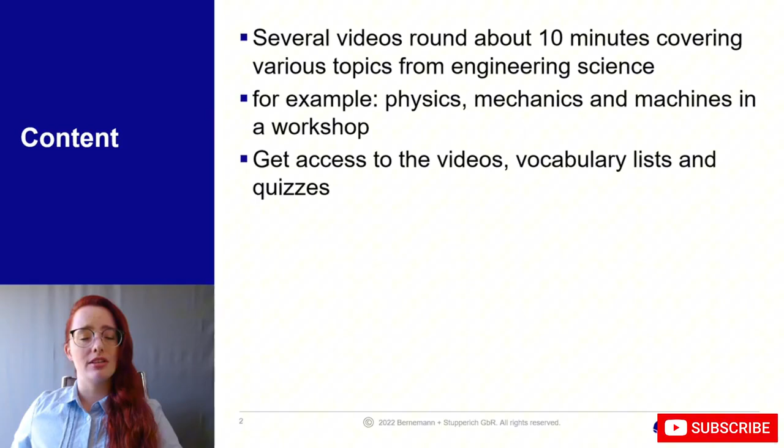Who is the audience, in my opinion? Well, I think that this course suits all people who want to expand their technical vocabulary. I also think that it suits employees from companies who work internationally or employees who need to visit a subsidiary or a production site in an English-speaking country. I would also recommend this course for students who want to prepare themselves for an exchange year in an English-speaking country. But in general, I think that this course could help engineers from all areas, from mechanical engineering, about electrical engineering, to civil engineering, to material engineering, and many more.

What is the goal of this course? We want to help you to build up your specific vocabulary for working as an engineer in an English-speaking country. A nice side effect is a short repetition of some technical basics, since the transmission of knowledge will take place with the help of science basics, which are relevant for most areas of engineering.

So, who am I? My name is Sarah. I'm 29 years old. I'm a trained car mechatronic. I've also received my technician's degrees for car technology and electromobility. I've worked as an assistant in research and development for diesel engines, and currently I am completing the teacher's training program at the RWTH Aachen in Germany. My subject in school will be engineering and English.

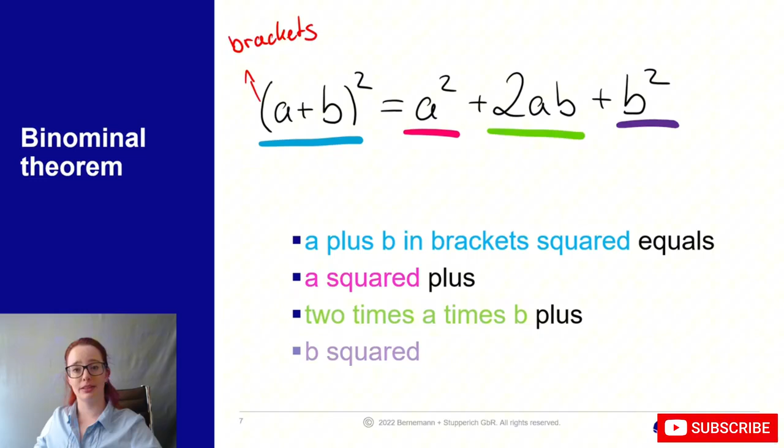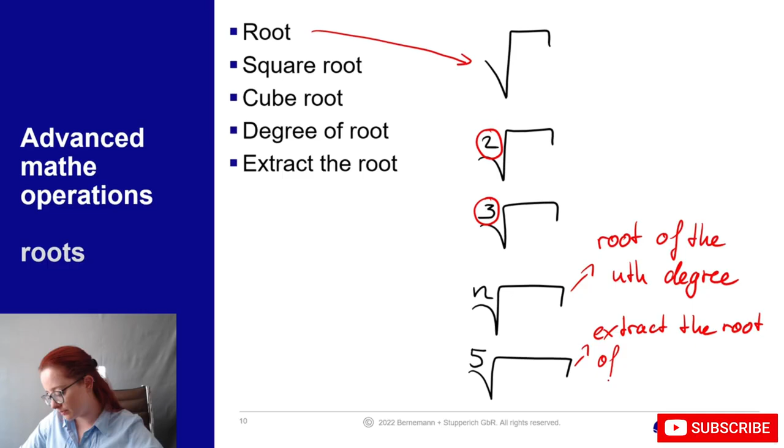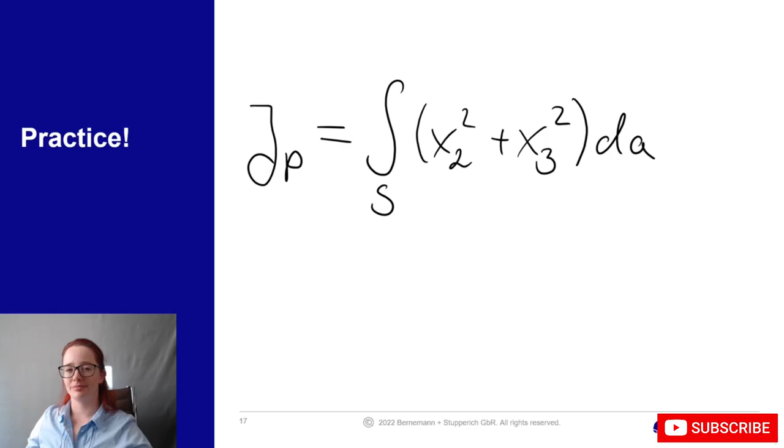Our last practice example. Pause the video and write it down. I would say something like jp equals the integral in the limits of s over x2 squared plus x3 squared times dA.

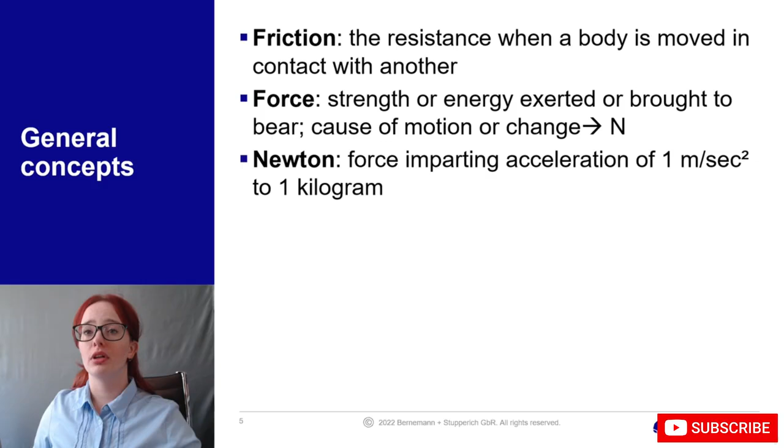1 Newton is the force imparting acceleration of 1 meter per second squared to 1 kilogram. Work is the force multiplied by distance moved. Gravity is the force that attracts objects towards one another, especially the force that makes things fall to the ground. And lastly, pressure. Pressure is force divided by area.

Now we will talk about some temperatures. Thermodynamics is the science of the relationship between heat, work, temperature and energy. Thermal energy is the internal energy present in a system in a state of thermodynamic equilibrium by virtue of its temperature. Temperatures are measured in Kelvin, degrees Celsius, or degrees Fahrenheit. Since Fahrenheit and Celsius aren't to be compared 1-to-1, there are some differences.

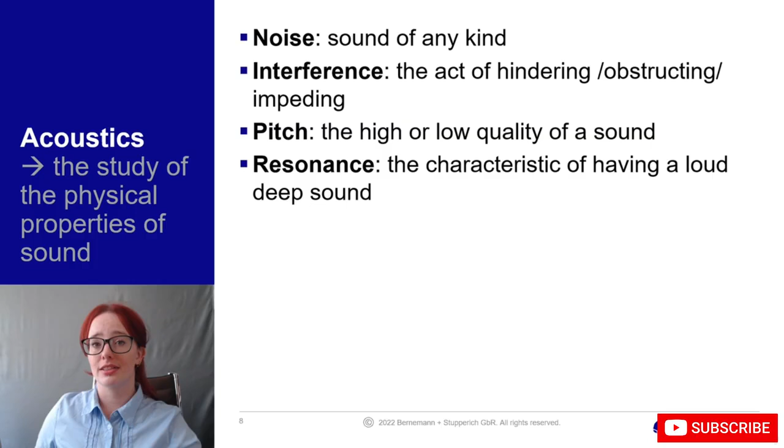Let's talk about acoustics. Acoustics is the study of the physical properties of sound. Noise can be any sound. Interference is the act of hindering or obstructing or impeding a wave. Pitch is the high or low quality of a sound. Resonance is the characteristic of having a loud and deep sound. A reflection is the phenomenon of a wave being thrown back from a surface. And lastly, decibels are a unit of sound intensity.

Let's talk about waves a bit more. A wave is a movement up and down or back and forth. Wavelength is the spatial period of a periodic wave, the distance over which the wave's shape repeats. Frequency is the number of occurrences within a given time period. Amplitude is the greatness of magnitude. Hertz is a measurement unit.

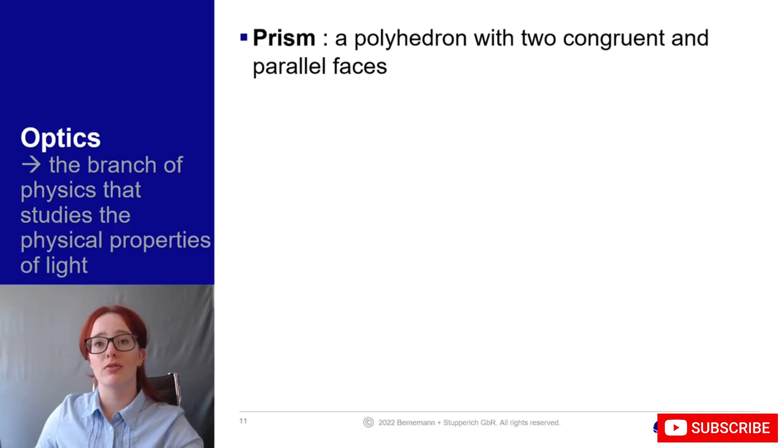Next up, we want to talk about optics. Optics is the branch of physics that studies the physical properties of light. A prism is a polyhedron with two congruent and parallel faces. A refraction is the change in direction of a propagating wave. If something absorbs, it takes something in, for example, waves of light.

Let's talk about chemistry. Chemistry is the scientific study of the properties and behavior of matter. Organic is a chemical compound which has a carbon basis. A compound is a substance formed by chemical union of two or more elements. For example, water is a compound because it is H2O. An element is a substance that cannot be separated into simpler substances, for example simply the O. A formula is a symbolic representation of the composition of a compound, so we could say 2H plus 1O become H2O.

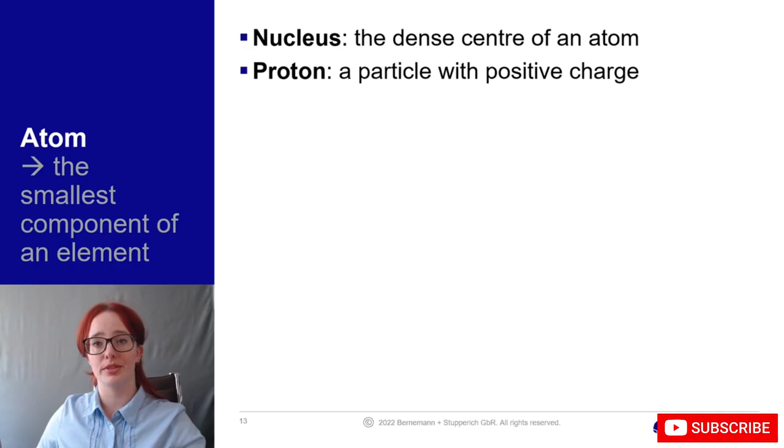Let's talk about atoms. They are the smallest component of an element. We have the nucleus, which is the dense center of an atom. We have the protons, a particle with positive charge. The neutrons, particles with zero charge. The electrons, particles with negative charge. Valence electrons are special electrons since they are in the outer shell of an atom, which can combine with other atoms to form molecules. A molecule is a group of two or more atoms held together by attractive forces.

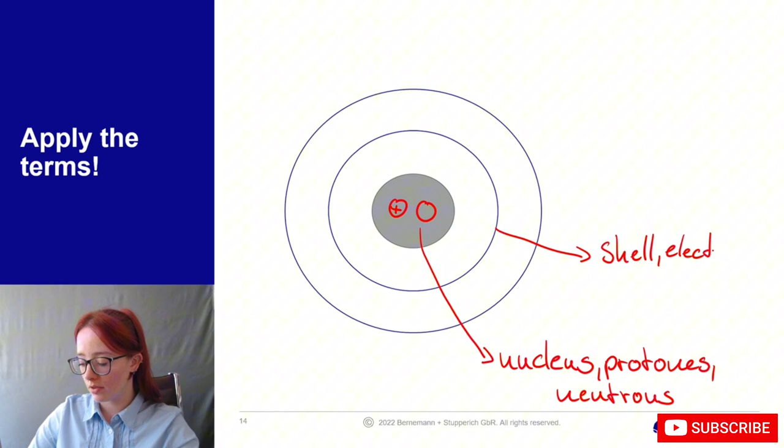Let's start in the middle of this thing. Here we have the nucleus. It consists, as you maybe remember, of protons and neutrons. If we move wider, we have the first shell, it's got electrons. And the most outer shell consists of valence electrons.

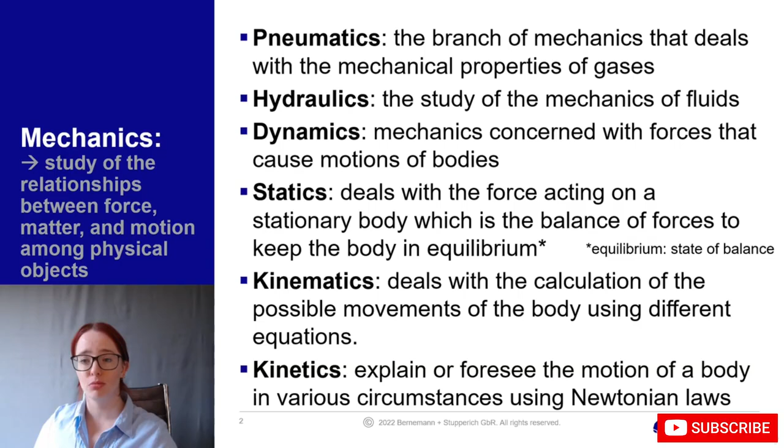Now let's talk about some general terms. First up, energy. Energy is the capacity of a physical system to do work. Potential energy is energy stored by a body or system by virtue of its position. So if we have, for example, this little tube and it is positioned down here, it has a lower potential energy than if I would lift it above my head. That's all what potential energy says.

Kinetic energy is the mechanical energy that a body has by virtue of its motion. So if I have this little tube here and now it would fall down, during the fall its kinetic energy would be higher than when it is standing still.

Power is the energy transferred per time, and work causes a change of energy. Joule is a unit of electrical energy, but it can also be transformed into other units. Talking about units, let's have a short look at these.

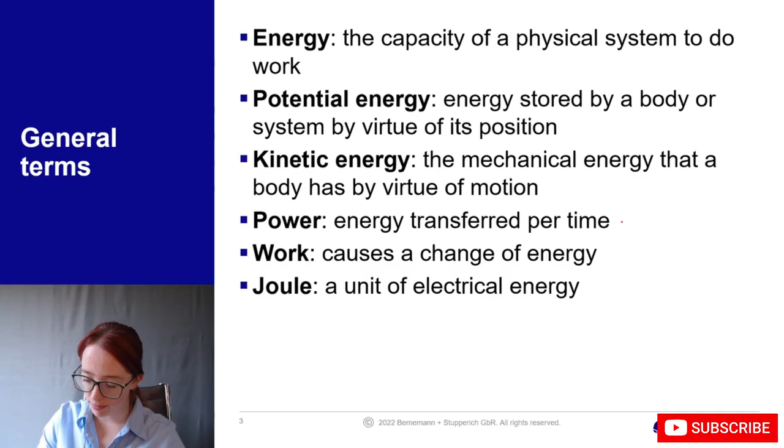Power is written with a capital P, and its unit is the watt. But 1 watt is also 1 joule per second, and we can also say it's 1 volt multiplied by amperage. But we can also say it equals 1 kilogram times meter squared divided by a cubic second.

So here we see that all these units are somehow linked to one another. It's important to have them in mind, and also to check your calculations, for example, to have a look whether these units make sense in your equation.

So after this little transformation of units, let's head on. Now we will talk about some simple machine parts you will come across when you are studying, and you often have to do some basic calculations.

First up, the rope. A rope is a strong, thick string made of twisted threads, like this one. So here we have our rope, and as you can see, it is on a hook.

Next up, the rod. A rod is a long, thin pole made of wood or metal, like this one. They are often used for framework constructions. So the area of a rod is something round.

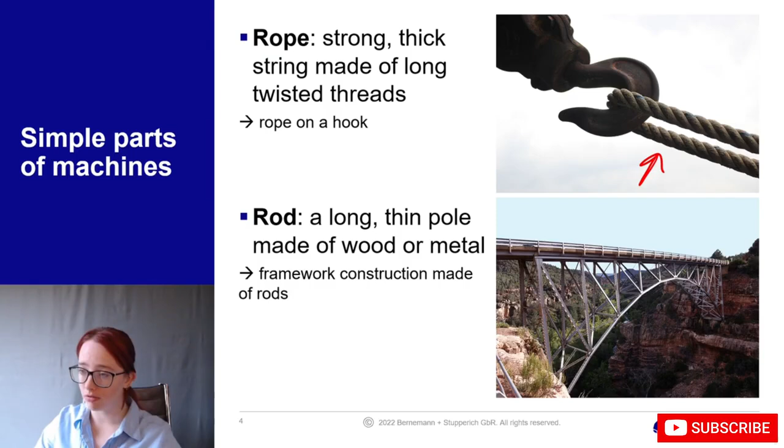This is important because next up, a bar is also a long, thin, straight piece of metal or wood, but as you can see in the picture, they have an area which is most often like this, or it could also be tetragonal or hexagonal, and they are used to make gates, for example.

A beam is a long, thick piece of wood, metal or concrete, especially used to support weight in a building or other structures. Here you see it used as parts of a framework construction in a house.

So let's talk a little further about simple parts of machines. A bearing is a machine element that constrains relative motion to only the desired motion and reduces friction between moving parts. We can have a fixed bearing or a floating bearing.

Here we have a ball bearing, and it is often used as a fixed bearing since those little balls are moving inside this little notch. I hope you have an idea what I'm talking about. And because they cannot move from one side to another, it is fixed, and therefore it's a fixed bearing.

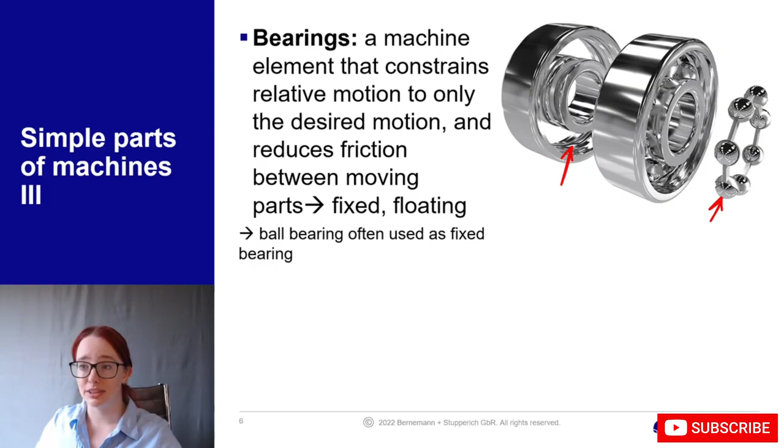A centroid, or the center of gravity—I think most of you will already know it. So if I have an object, it has a centroid or a center of gravity. And if we have a triangle like this one, we will find it quite easily. Now you see I'm balancing it on my finger, and it's still somehow in equilibrium, so it doesn't move.

Now we will talk about mechanical loads. First up, the stress. This is a force that produces strain on a physical body, and strain is the deformation of a body under the action of applied forces. So if I'm taking this triangle and I'm bending it, I apply stress and it ends in a strain of the triangle.

Velocity is the distance traveled per unit time in one direction. Well, we all know velocity—I think we know it best from cars or buses or bicycles. Speed is a rate at which something happens. So, of course, we all know speed from cars, bicycles, and trains.

But speed is also how fast or slow I am bending something. So even there we can talk about speed.

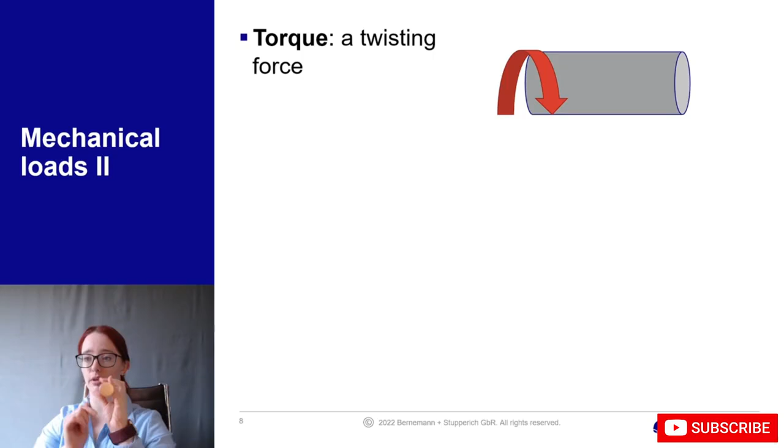More mechanical loads are, for example, the torque, which is a twisting force. So if I now here have something with a round area, I can twist it, but I can also do it with something cubic, but I just have this round thing.

Friction is the resistance when a body is moved in contact with others. So we all know it from, for example, a table or a chair we want to move across a carpet—then they have friction between each other. But if we have a look at my thingy here and I tear it apart, it also experiences friction between the rubber and the tube.

A distortion is a change of the original or natural shape of something. So for example, if you have a tennis ball, and you squeeze it, then it's a distortion.

The moment load is a turning force produced by an object acting at a distance. This sounds complicated, but it's simply something with a bearing. So here we have a fixed bearing, and then we have a force, which would be this hand, and it applies some strength. Now we have a distance and an acting force, and this causes a momentum.

A moment load. Be aware, a moment load is not the same as momentum. So I've done something wrong, because momentum is a product of a body's mass and its velocity.

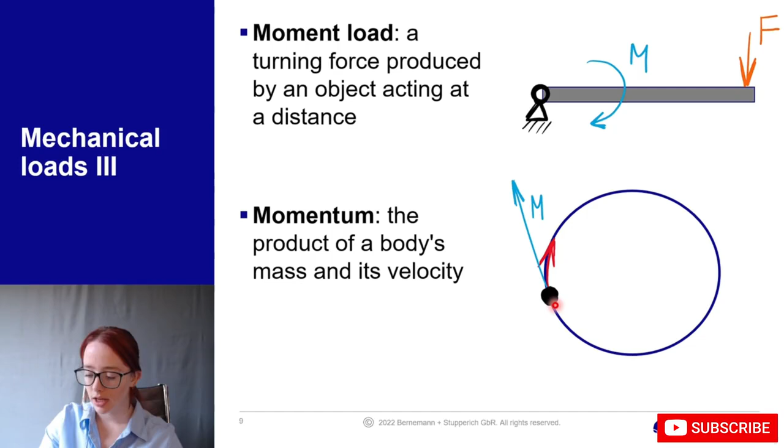For example, if I have a tennis ball on a rope and let it fly in a circular motion, it has a certain momentum. If I let go of the string, the ball would fly away. As you can see in this drawing, the ball is attached to a string connecting it to the middle of the circle, and it always has this velocity. If I let it go, it flies in a straight motion because of its momentum.

Tension is a stress that produces an elongation of a physical body, which means something gets longer. So again, if I take this tube and apply some tension, it got longer. The counter movement is pressure, the act of putting pressure on something so it becomes shorter. For example, if I take this and put it back together.

Let's talk about some applied mechanical loads. Rods and bars, the thin and long construction pieces, take only tension and pressure. Here we have a framework construction, and per definition this can only take a force like this or a force like this.

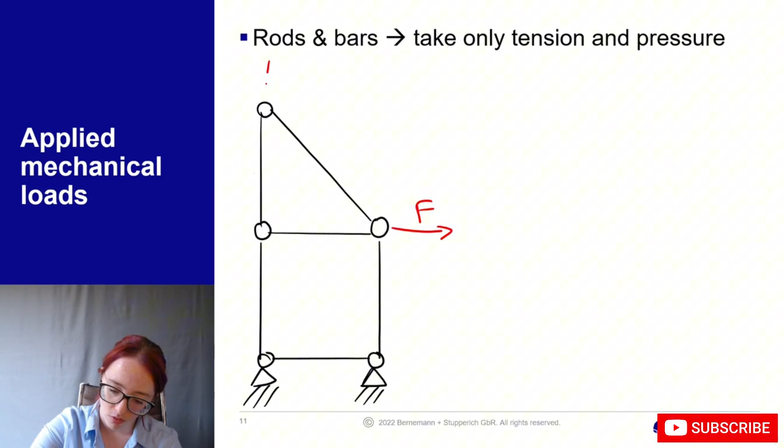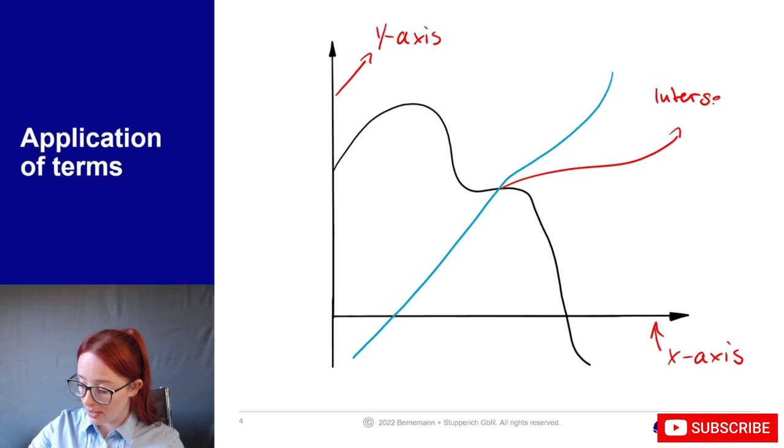So let's apply some terms we just learned. I will pause for a moment so you can pause the video and write down the words you remember. I want to start with the axis. So here we see our y-axis and here our x-axis. We also spot an intersection. I would say that the graph from here to here is linear. We can also spot some zero points, here and here. We can also spot some rising and some falling.

So next up are variables and sorting. We often have an independent variable, which is a value that does not depend on changes in other values, and the dependent variable, a quantity whose value depends on another quantity. So often the dependent variable depends on the independent one. If we have two variables, something is called bivariate.

A group is any number of entities which are considered as a unit. So if they are arranged into groups, you can say that they are grouped. We can also have classes, and a class arranges or orders by categories. If something is categorical, it is relating to or included in a class or in classes. And we can also categorize, which means we place something into or assign it to a category.

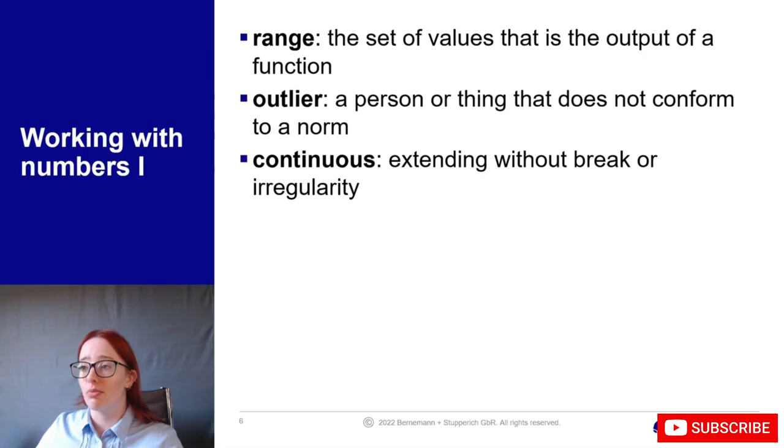Continuous means it is extending without a break or irregularity. If it is numerical, it is relating or denoting numerals, so numbers. If it is ordinal, variables have a natural ordered category.

A percentage is a proportion in relation to a whole. The mean is approximating the statistical average or the expected value. The median is relating to the middle value of an ordered set of values. The mode is the most frequent value of a random variable.

A correlation is a statistic representing how closely two variables covary. So if we are changing one, the other is changing as well. We can therefore say they are both depending on one another.

An interpolation is a calculation of the value of a function between known values, whilst an extrapolation is a calculating of a value outside of the range of known values.

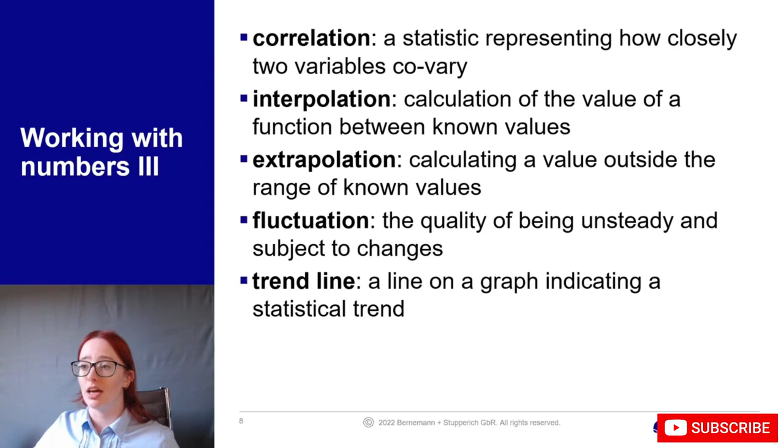Fluctuation is the quality of being unsteady and subject to changes. A trend line is a line on a graph indicating a statistical trend. We can therefore say that a fluctuation and a trend are somehow opposites to one another.

An interval is a set containing all points between two given endpoints. A frequency distribution is a distribution of observed frequencies of occurrence of the values of a variable. A variation is an instance of change, the rate or the magnitude of change.

So if we have a lot of variation, we have a wide range of data we collected with a very wide range of magnitude, for example. So maybe we collected many data points and we have values from 1 up to 500, then we have a lot of variation.

A deviation is the difference between an observed value and an expected value. So if we expected that we will only get 500 as a measurement, but suddenly we have 5,000, this is a very huge deviation. A discrepancy is an event that departs from expectations. So it's just like a deviation, but a bit more extreme and singular.

Distribution is an arrangement of values of a variable by frequency. A normal curve is a symmetrical curve representing a normal distribution. And exactly this normal curve is also called a Gaussian bell curve.

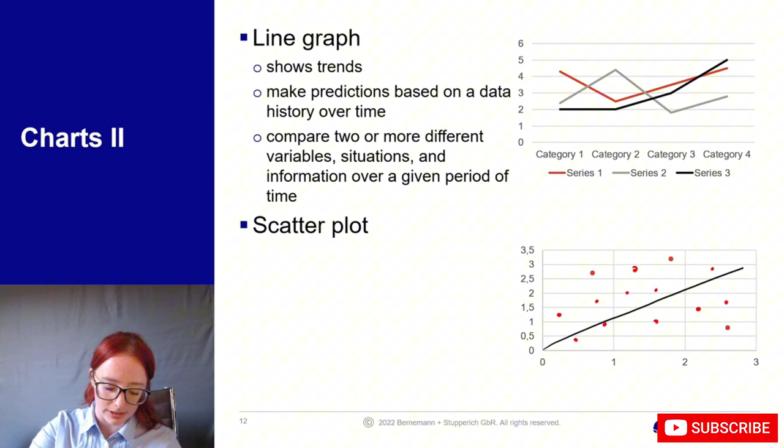Scatter plots help you find out whether there is a relationship between two variables. They predict the behavior of the dependent variable based on the measure of the independent variable—essentially, whether two things are dependent on one another.

Now we will talk about box and whisker charts. This is how they look. They visualize the upper and lower quartiles, the mean, the median, deviations, and other stuff. They are able to represent a huge set of data, giving a quick view of the dataset distribution, and they can compare data from different categories or datasets. Here we have three colors, so most probably three datasets.

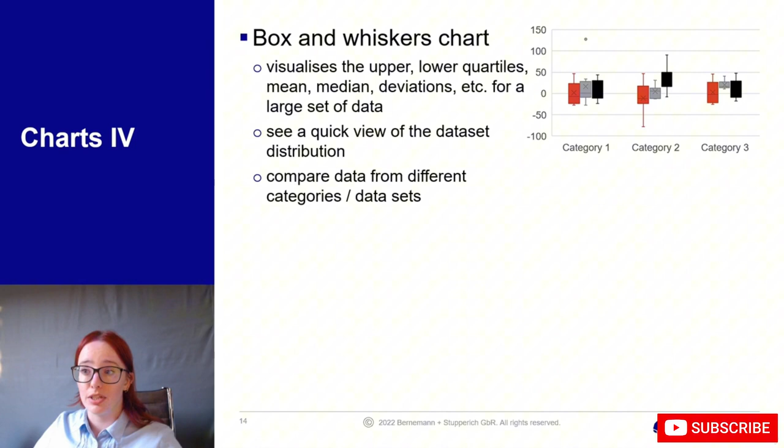Now it's your turn. I hope you will remember some of the terminology I just introduced, and that you can apply it now.

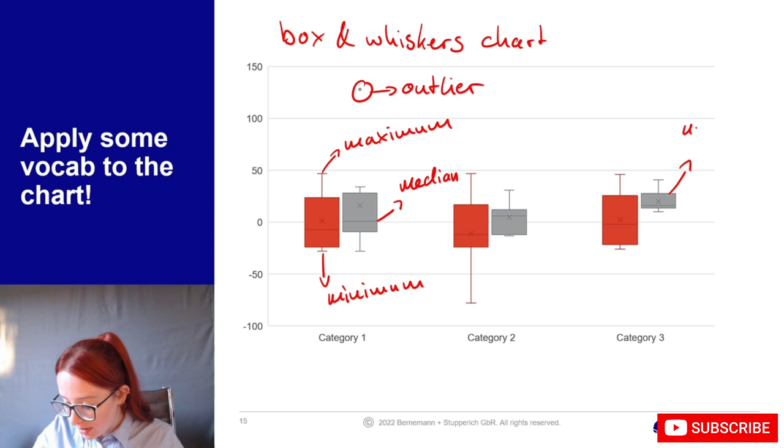So here we have a box and whiskers chart. We will start with this little spot here—this is an outlier. Here we have a maximum, here a minimum. The line in the middle is the median. And we can also spot the upper quartile and the lower quartile.

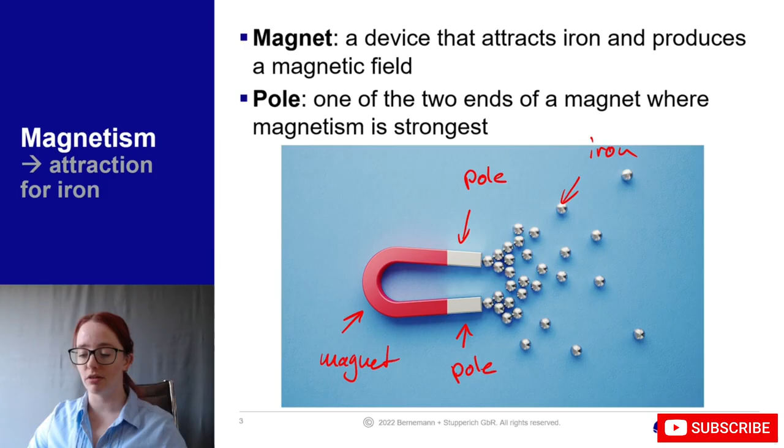To go a bit further into detail, we also have two poles—here is one, and here is one. A pole is one of the two ends of a magnet where magnetism is the strongest.

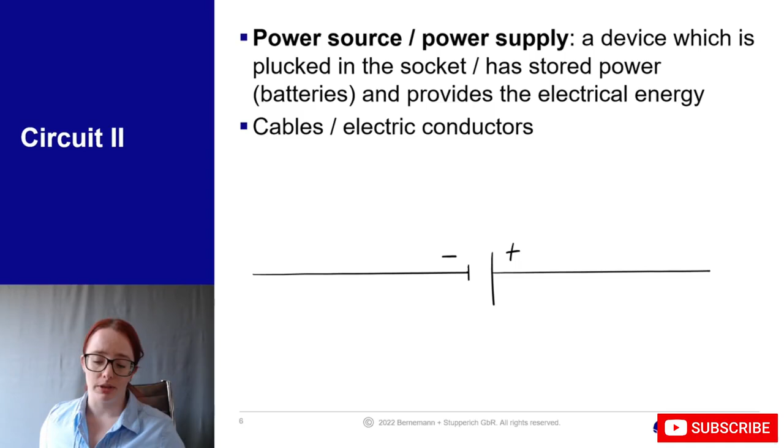So let's have a look at circuits in detail. We often need a power source or a power supply, and this is often a device which is plugged into a socket or which has stored power, for example batteries, and they provide electrical energy. And we need cables. So here we have our power source, and these two lines are our cables.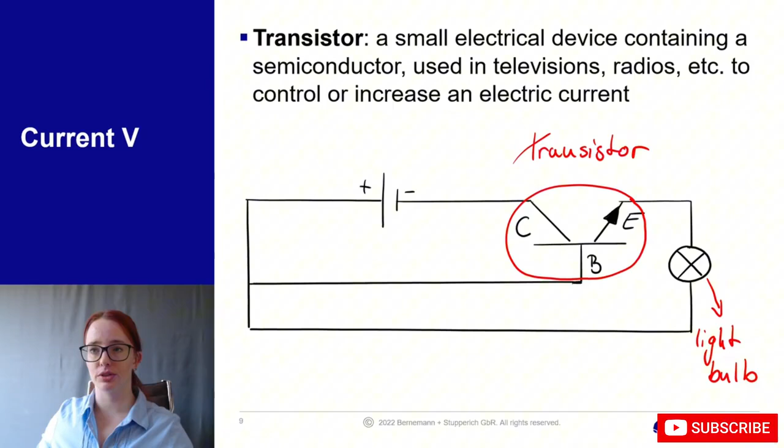So if we ask ourselves, where do we have these? A series connection is often in Christmas lights. If one is broke, there is no light shining anymore. And a parallel connection is often in batteries. If one is broke, the others will work perfectly fine. But of course, the power output will be less.

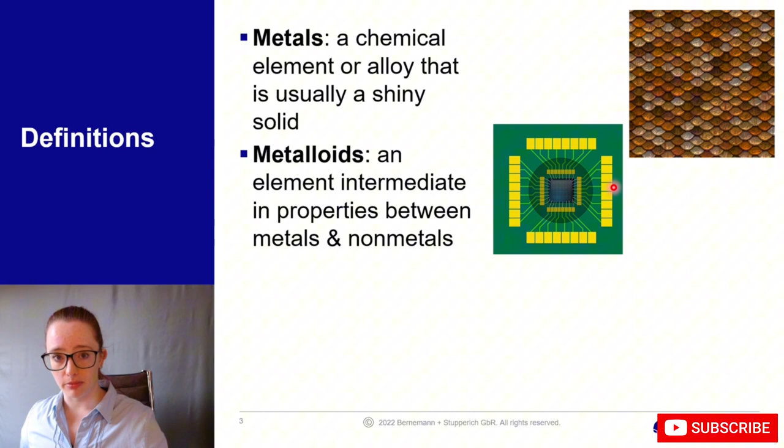So how are these defined? A metal is a chemical element or an alloy that is usually a shiny solid, so it is very hard and it often has a shiny surface. Metalloids are elements intermediate in properties between metals and non-metals, so they have some characteristics of metals, but also some of non-metals. And a non-metal is a chemical element that lacks the characteristics of a metal.

So let's talk about metals. Minerals are a solid inorganic substance occurring in nature, and within these minerals we often can also find metals. An alloy is a mixture containing two or more metallic elements. For example, all your jewelry is most probably an alloy of several elements. A grain is the form of the crystals in a metal.

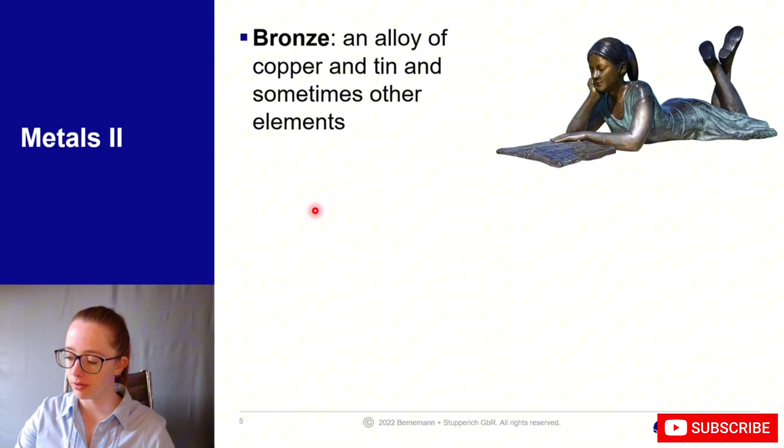So let's talk about metals a bit further. A bronze is an alloy of copper and tin and sometimes other elements. Here you can see that this figure has most probably around 3 different bronzes. The hair is very dark and has no coating on it. Then we have the face, the upper body and the arms, which are very brownish. And then we can see that the dress has this green-bluish coating, and I think that the dress most probably has the most copper in it.

Next, we want to talk about the metallic elements you can find in the periodic table a bit more in detail. I won't be able to talk about all of them, but I want to show you some which were the most important for my studies and also for my work.

First up is lithium. It is a soft silver-white univalent metallic element, and it is the lightest metal known. Next to it is beryllium, a light, strong, brittle, gray, toxic, bivalent metallic element.

Underneath it is magnesium, a light silver-white, ductile, bivalent metallic element. Magnesium is often used, for example, when you have a high-speed car and their rims are made out of magnesium, or the trunks, because it is very light but still very strong.

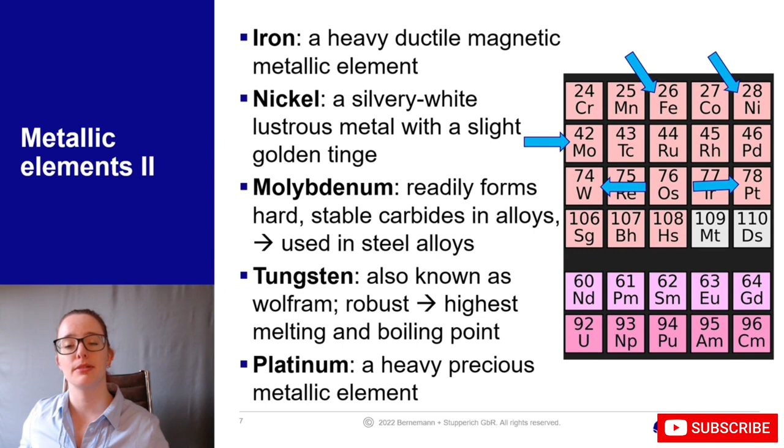So now we want to talk about copper. Copper is a ductile, malleable, reddish-brown, corrosion-resistant, diamagnetic metallic element. We all know copper is very good to be used in some wires, for example, because it is good for conducting current. Next up is zinc.

It's a bluish-white, lustrous metallic element. Silver, a soft, white, precious, univalent metallic element. We know silver from jewelry, for example, just as well as gold. Gold is a yellow, malleable, ductile metallic element.

And mercury, a heavy, silvery, toxic metallic element. It is the only metal that is liquid at an ordinary temperature. We all know mercury from older times when, how are they called, temperature scales were filled with mercury, because mercury expands when it gets warm.

And so these temperature scales were kind of dangerous, because if a child would drop them, they could not just be cut by the glass, but they could also be poisoned by the mercury in it.

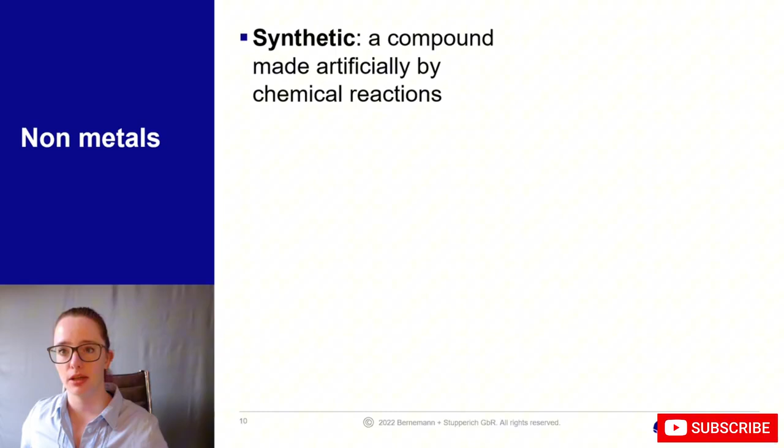And a diamond is a very hard native crystalline carbon valued as a gem. And if you combine it with, for example, a silvery ring, we have a construct.

Synthetic rubber is any artificial elastomer, and they have a different range of physical and chemical properties. Because of that, we can use them for tires, gaskets, or flooring, or for example, running shoes or coating of some lifting equipment.

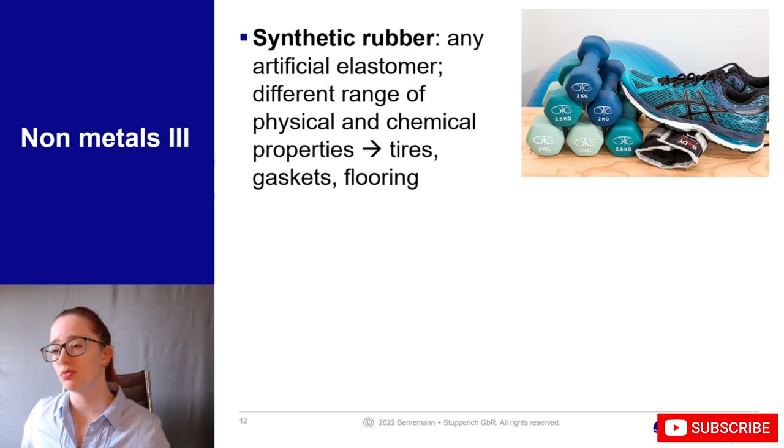Wood is porous and has a fibrous structural tissue. It is found in stems and roots of trees and other woody plants.

So, where can we find these non-metal elements? Carbon is an abundant non-metallic element in all organic compounds, so even in diamonds, as we just have heard. Nitrogen is a common non-metal element, and it's a constituent of all living tissues.

Now we want to talk about some general characteristics of materials. They have a surface, which is the outer boundary of an artifact or a material layer. They have a texture, which is the feel of a surface or a fabric.

So you can say that when you touch the surface, you can feel the texture of something. For example, if I feel the texture of my blouse, I can feel that it is weaved and it is quite soft, and I can wear it quite easily and comfy because it isn't stiff.

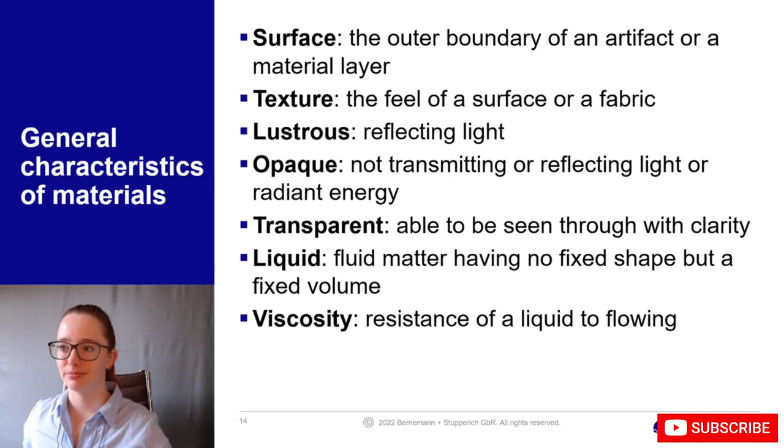Fragile means something is easily broken or damaged or destroyed, for example, like glass.

Hollow means something is not solid. It is having space or gaps in its cavity. For example, a football would be hollow because it has a surface made out of leather or something like this, but within it there is a lot of nothing, so it is hollow.

An insulator is a material with little electrical or thermal conductivity. For example, ceramics are a very good insulator, while copper is most probably the worst insulator you could use. Conduction is the transmission of heat, electricity, or sound.

This is closely bound to an insulator. Ceramics are poor for conduction because they are not transmitting any electricity, but copper is a good conductor because it is letting the current of electricity flow very easily.

Porous is a material with void spaces. And if something is likely to dissolve, it will pass into solution. So salt, for example, if you put a tablespoon of salt in boiling water for noodles, it dissolves very easily.

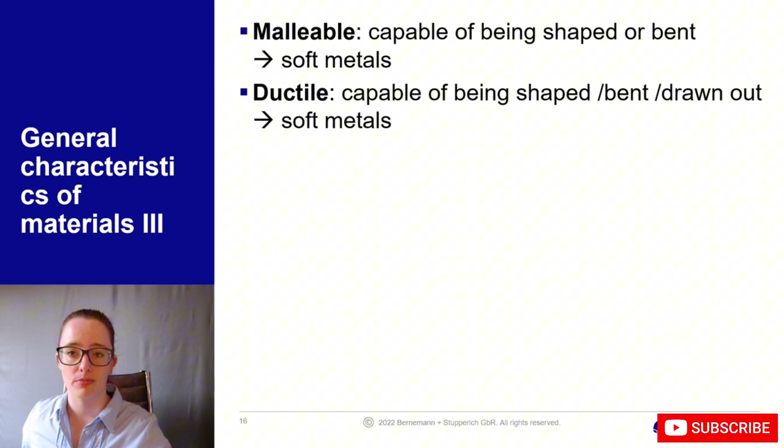Elasticity is the tendency of a body to return to its original shape. It is resuming shape after stretching or compression. For example, if you have rubber, you can just bend it and it will always come back to its shape and it doesn't really care.

Toughness is the elasticity and hardness of a metal object.

If something is inelastic, it is not able to resume shape after stretching or compression. For example, ceramics. If you have this thing, you cannot bend it even if I squeeze very hard. But if I squeezed even harder, it wouldn't be able to resume its shape because it would simply break.

If something is solid, it is not soft or yielding to pressure. So, for example, if you have a huge chunk of cast iron, it is very solid, so you cannot compress it any further.

Stiff means it is incapable of or resistant to bending. For example, ceramics or glass. You cannot bend them because they would break or do nothing.

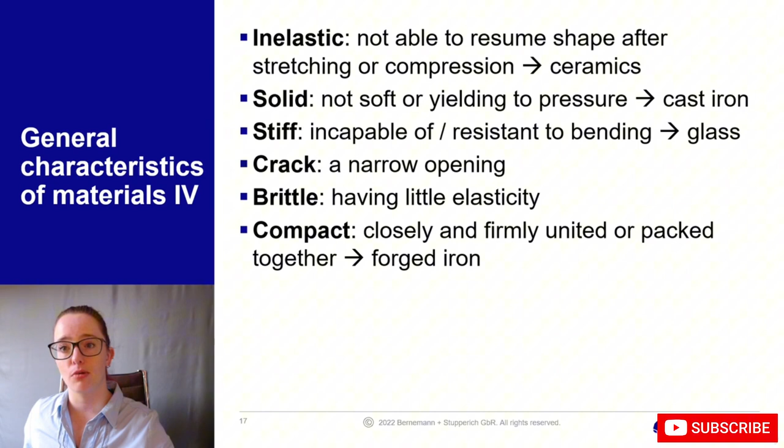If something is compact, it is closely and firmly united or packed together. So again, for example, forged iron.

The density is the amount per unit size. So if something is very compact, it has a high density. And if something has a lot of void between it, if it is very porous, it has most probably a low density.

Corrosion is an erosion by chemical action. So if you have already seen, iron will have rust on it, which is the corrosion of iron, and copper or aluminium will have a bluish coating after some while.

Magnetic means something has a certain attraction to magnets, or conversely, a magnet is attracted to iron and iron is attracted to a magnet, so they interact a lot.

So, I have talked a lot now. I want you to pause the video and apply some of the characteristics I have just told you.

Okay, so first up, here we have a foam material. It has a low density because it has a lot of voids within it. It is very elastic, soft, and porous.

Then here we have paper clips. They are elastic, so you can bend them. They are magnetic, as you can see, because they stick to this magnet. They are ductile, so you can squeeze them easily.

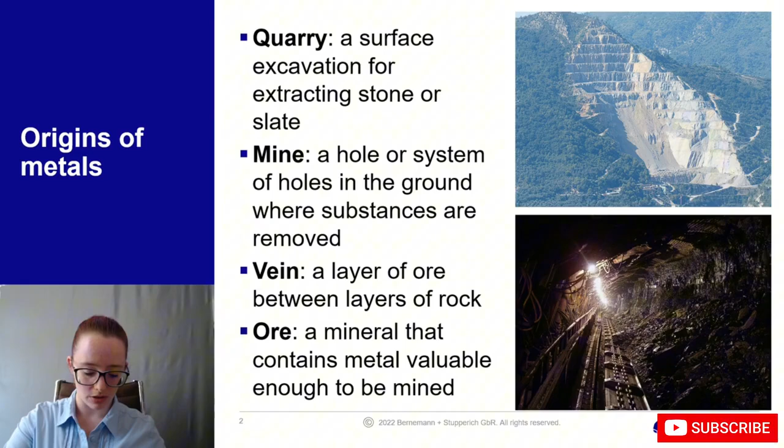A vein is a layer of ore between layers of rock, and ore is a mineral that contains metal which is valuable enough to be mined. So if we have a look at the dark picture of the mine here, we can see that there are some layers which are more lustrous than the rest, and within these layers run the veins, and these veins contain the ore.

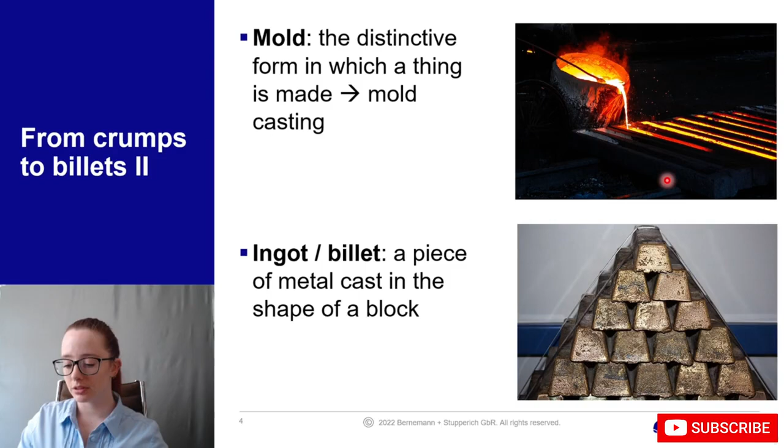An ingot or a billet is a piece of metal cast in the shape of a block. So we put the molten metal in a mold and afterwards we will receive a billet.

Blacksmithing. A forge is a furnace used to heat metal so it can be worked or melted. But if something is forged, it also means it is created by hammering. Heat is a form of energy transferred by a difference in temperature, but you can also say to heat something up.

If you pat it with a hammer, you hit it lightly, so you make a fine form. But if you smash it, you hit violently and you want to get a rough shape. Squeezing is also used in blacksmithing, but if you squeeze, you press very firmly, so you will most probably use the help of a hydraulic press.

Treatments for metals. There are several heat treatments, for example, homogenizing, grain coarsening, normalizing, recrystallizing, soft annealing, or tempering, but I won't talk about these in detail because these are so complex that it would be like an hour of just talking, and we won't do it in this video.

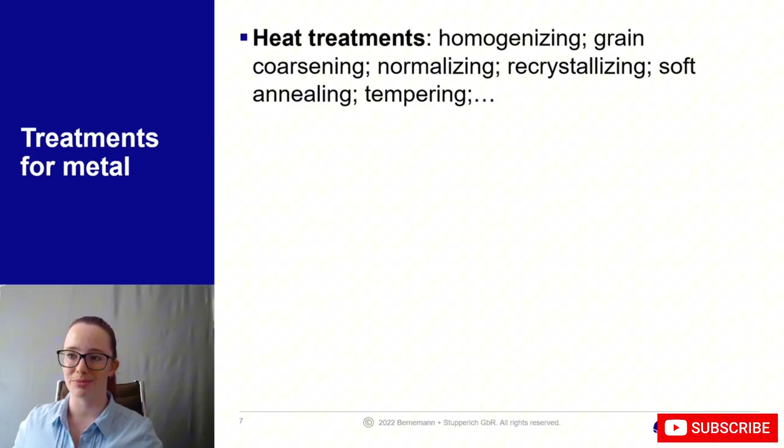Quenching is the rapid cooling of a workpiece in water, oil, polymer, air, or other fluids to obtain a certain material property. And if you quench it very rapidly, for example in water, you would reduce the elasticity, so it gets very stiff and brittle.

If you temper your workpiece, you also apply a process of heat treating, but this is used to increase the toughness of iron-based alloys. So after quenching, you have a very hard and stiff material with a very low elasticity, but after tempering, it is more elastic but still very hard.

To concentrate something means to make it denser, stronger, or purer. So when you quench and temper, you can concentrate the metal more, and you can also purify it, especially when you forge it and foreign materials get burned and then they are in form of slag all around the workpiece, and then you just brush it away and then it's more pure.

Joining materials permanently. Flux is a substance added to molten metals to bond with impurities. So, as I just said, when you are forging, you will add some flux, and then all the scum is collected, so it bonds, and then you can brush it away or hammer it away.

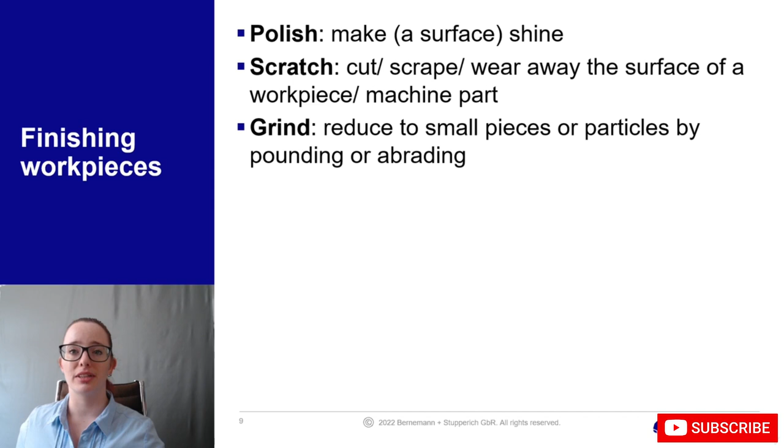To grind means to reduce to small pieces or particles by pounding or abrading. We will have a look at a grinder in a minute.

If you tear something, you separate it or you cause it to separate abruptly, which means that if I would tear on this pencil and it suddenly rips apart, I have torn it apart.

And to drill means to make a hole, especially with a pointed power or hand tool.

Now we want to have a look at some machines. A machine is a mechanical or electrical device that transmits energy.

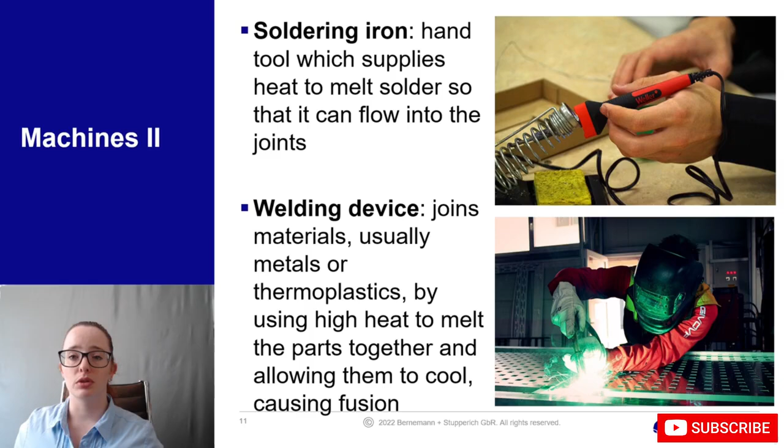A compressor is a mechanical device that compresses gases, and this is very important for a workshop for many reasons, because you can power many tools with the help of compressed air.

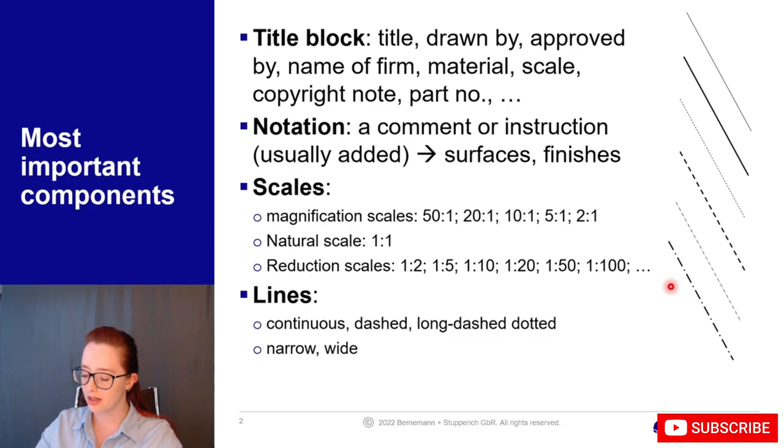Also, we have several different lines. We have continuous lines, dashed lines, and long dashed dotted lines. And each and every line can be narrow or wide.

There are not just rules for our lines, but also rules for the arrowheads. They have to be at a 15-degree angle, they have to be very thin, and they have to be fully blackened.

What is the purpose of a technical drawing? It is a piece of communication, so it's the activity of conveying information. It is an official document. It is a representation of a person's thinking with symbolic marks.

And these symbolic marks on a technical drawing are also following rules. These symbols are about surface quality, tolerances, or manufacturing processes, for example. So there is a symbol for milling, grinding, or polishing.

These drawings are often very complex, but we want to communicate about them clearly, directly, and effectively. We want to avoid misinterpretation, and therefore there are strict rules, all written down in the international industrial standards. A drawing has to meet the standards in order to be understood by each and every manufacturing or reading person.

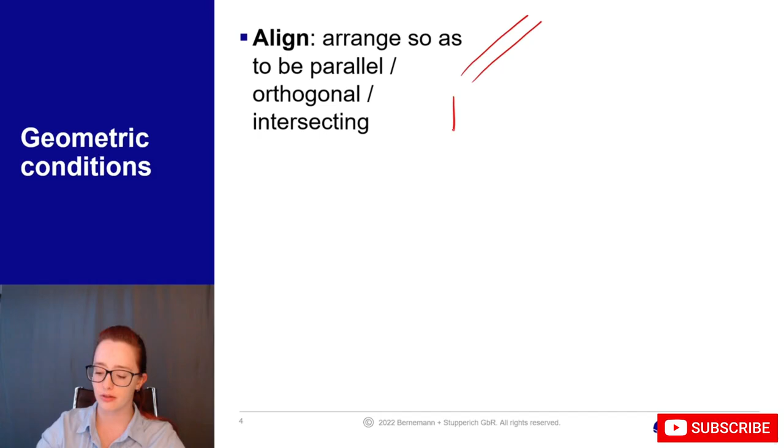Geometric conditions. To align: align means to arrange so as to be parallel, orthogonal, or intersecting. So something parallel is like this, something orthogonal is like this, and an intersection is something like this.

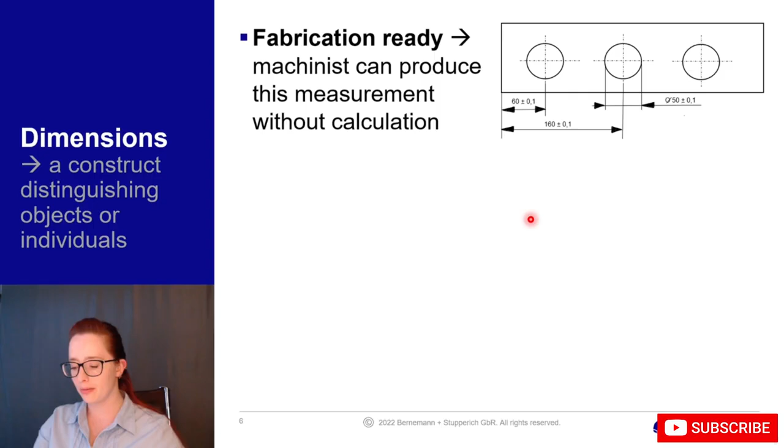Dimensions are a construct distinguishing objects or individuals. There are 3 different ways to dimension your object. First up, fabrication ready, which means a machinist can produce this measurement without calculating. So on this drawing you see that this corner is a reference point, and from there on each and every measurement can be simply understood, so the machinist does not have to calculate how far things are apart.

Next up is function ready. Each measurement has, according to its function, the highest tolerance. The tolerances are behind the actual measurements, so plus minus 0.1 in this case.

And lastly, check ready: an inspector can check this measurement without calculation. So you see, an inspector works a bit different than a machinist, but reasons for this are very complex. So you have to keep in mind how a machinist works in order to make a technical drawing fabrication ready.

When you use parallel dimensioning, which is more fabrication friendly, you always take one corner as a reference point, and from that on you take all your measurements. It also applies here.

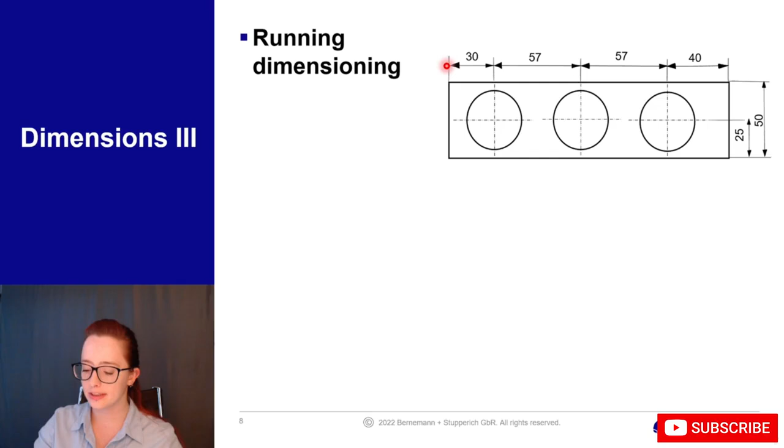The running dimensioning starts at one corner and runs to the other corner. But here the machinist has to do some calculation. If he starts manufacturing here and he has drilled this hole, he has to calculate how far the distance is from this edge to this middle.

And a staggered dimensioning starts in the middle and then it moves outwards. This is often used for round objects.

A shape is a perceptual structure. We have a profile, which is an outline of something from one side, so from the front, from the back, from left or right, from above or from below. The outline is the line that appears to bound an object. The depth is the extent downward or backward or inward, and flat means having a surface without a slope or a surface which is level.

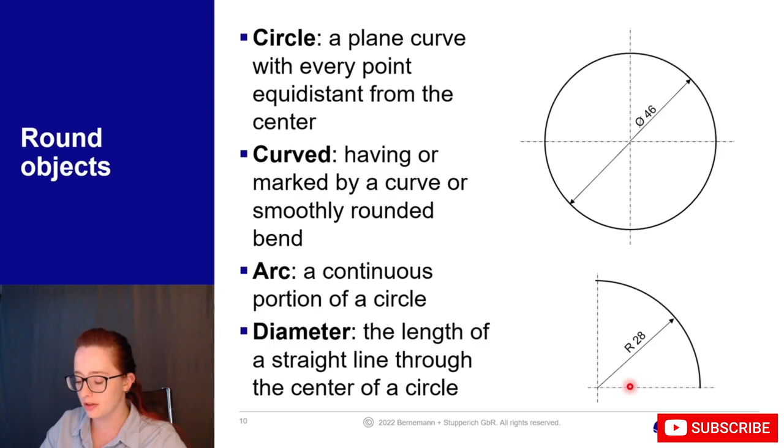The diameter is the length of a straight line through the center of a circle. Here we have the diameter and here we have the radius, which is just half the diameter. We see here a circle and here an arc with a certain angle, so in this case 90 degrees.

A cylinder has also round bases, but they are parallel to one another. So the sides are not tapering.

Angles. The angle is the space between two lines or planes that intersect. So here we have our angle. And a slope is a surface which is at an angle.

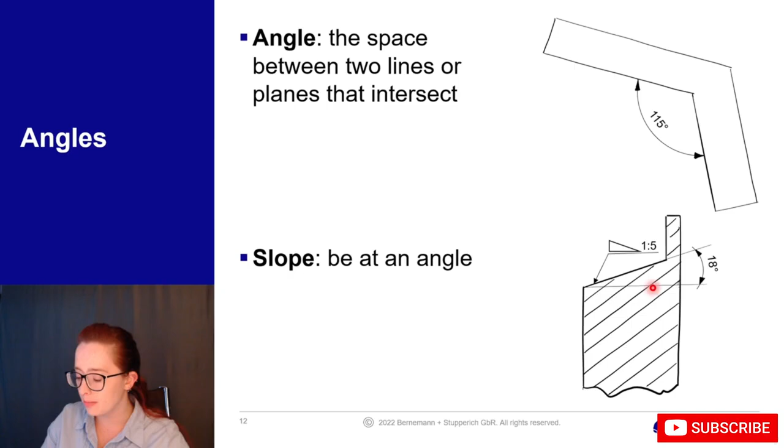So here we have a surface with an angle of 18 degrees, or you can also tell it with the help of a ratio. So height to length, you can say. So this is, for example, 1 centimeter high, but 5 centimeter deep.

3D illustrations. There is the isometric scale, also called the isometric projection. It has two 30-degree angles to both sides. The edges are measured and drawn with 100%.

The true scale, which most of us will know from school, has just one 45-degree angle, 100% length at the front and on the height, but the edges running backwards are just half the length they actually are.

And the dimetric scale, or the dimetric projection, has two different angles. So we have a 7-degree angle and a 42-degree angle. The edges are just like the true scale with 100%, 100%, and 50%.

Now we want to talk about sections. Sections are along a cutting plane. So first we want to cut along this plane. We receive a form like this.

So let me show you. If we have a look at this rectangle, you can say that it is this piece. This part of the drawing is cut from here to here. And lastly, the triangle, which is here, is visible here.

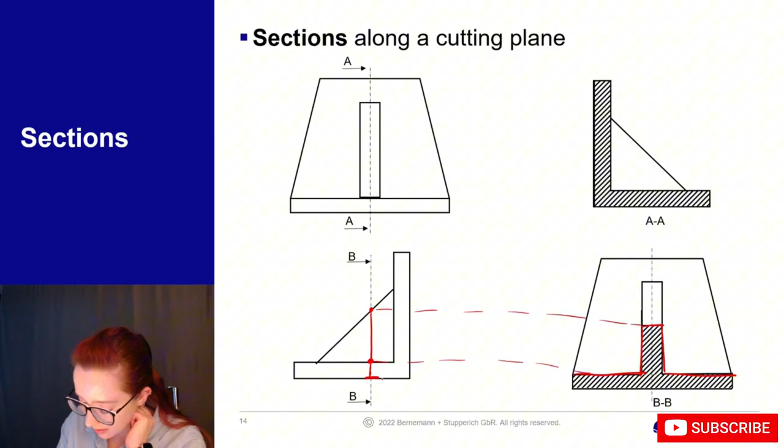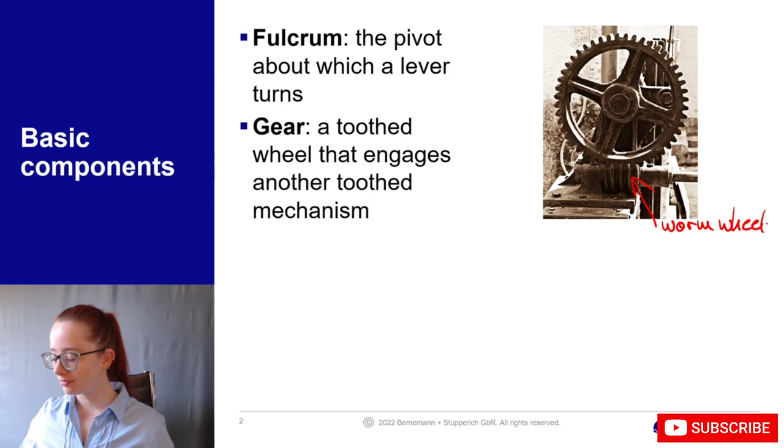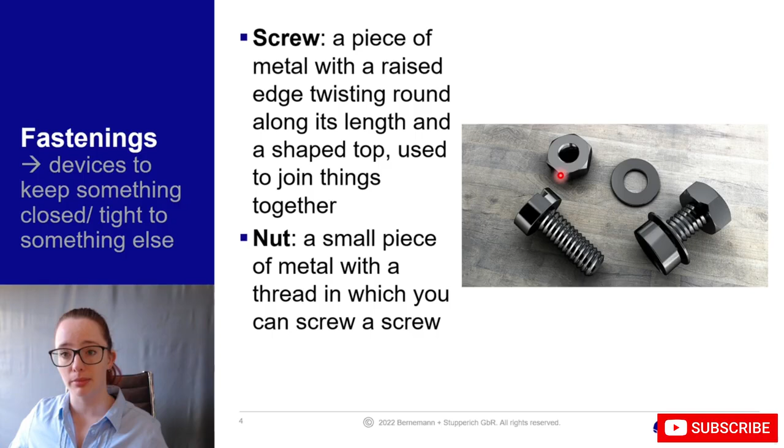And a nut is the counterpart for it. It's a small piece of metal with a thread in which you can screw a screw. So as they have done here, you can take this nut and then screw it onto the thread of the screw.

Next up, the washer. A washer is a flat ring that is put between a screw or bolt and a surface, or between joined pipes, in order to make a better connection between them and to protect the surface. So if you are connecting two pipes, you use it so the connection between the surfaces is better. You also use a washer if you have drilled a hole bigger than it should have been. Then you can use a washer and screw the screw through the drilled hole without throwing the entire piece away.

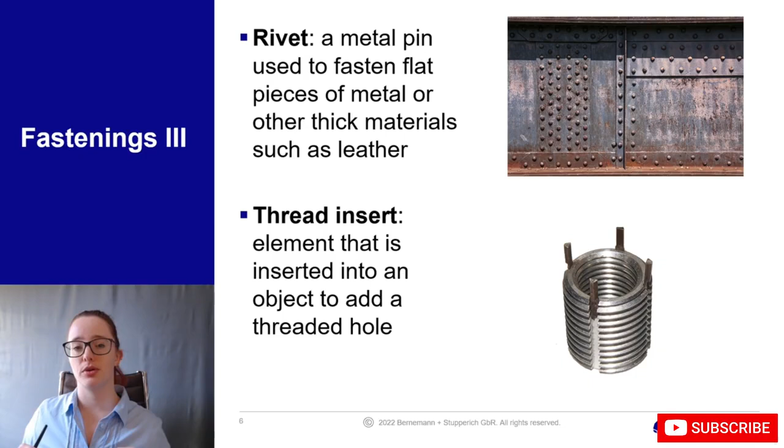A thread insert is an element that is inserted into an object to add a threaded hole. For example, if you are restoring a very old car and take out the engine to work on the engine block, it is likely the threads in it are so old they will fall apart the moment you loosen the screws. Then you can drill it out and insert a thread insert, so there is a usable thread in it again.

A bearing is essential for this, because it is a part of a machine that supports another part that turns around. We can have a fixed bearing and a floating bearing. If we want to connect, for example, a wheel to an axle, we will most probably use a fixed bearing because it should not move. If a bearing is fixed, the inner ring is not able to move apart from the outer ring. But with a floating bearing, the inner ring and outer ring can move against each other up to a certain point. If it is a very floating bearing, it can happen that if you flip the bearing, the inner ring will just fall apart.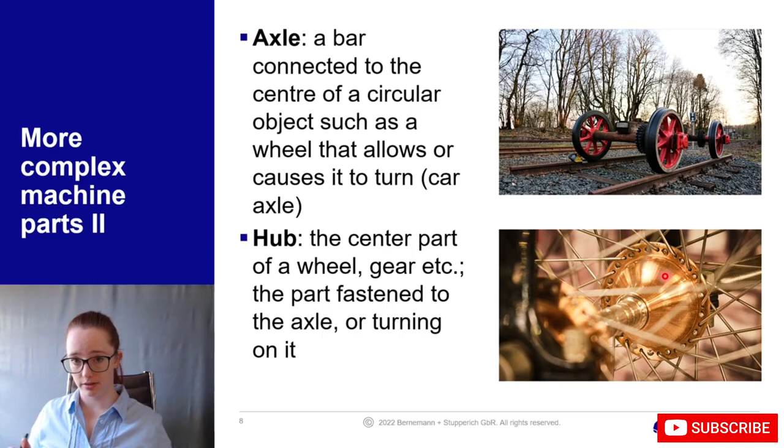An axle is a bar connected to the center of a circular object, such as a wheel, that allows it to turn. For example, a car axle, or like here, a locomotive axle. The bar connected to the center is this, and the circular objects are simply wheels. A hub is the center part of a wheel or gear, fastened to the axle or turning on it. So here you have the hub, attached to this axle, and this should be a bicycle wheel. The hub is essential because it fixes the wheel to the axle so it cannot fall apart.

Let's talk about engines. Engines are motors that convert energy into work or motion. Combustion is a reaction of a substance with oxygen to give heat and light. So a motor which converts energy into work does this with the help of combustion. Chemical energy from the fuel is, via combustion, converted into motion. A cylinder is a chamber within which a piston moves.

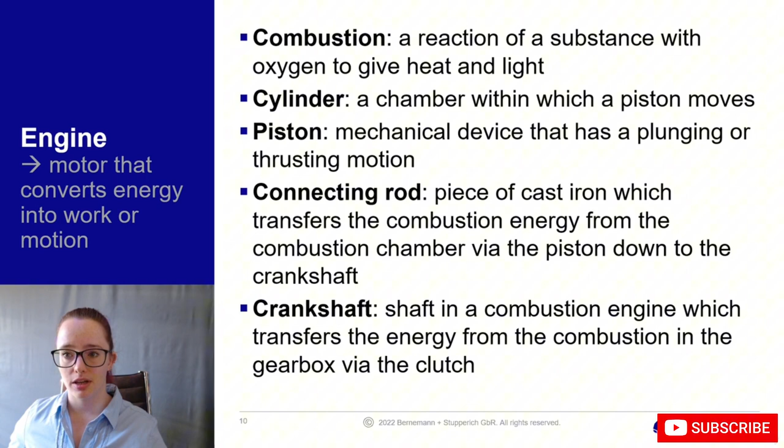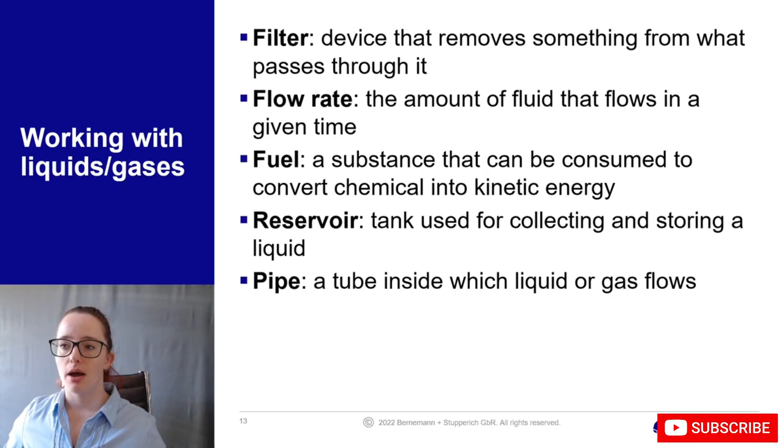A flow rate is the amount of fluid that flows in a given time. Fuel is a substance that can be consumed to convert chemical into kinetic energy, so diesel for example. A reservoir is a tank used for collecting and storing a liquid. A pipe is a tube inside which liquid or gas flows. And a hose is a long plastic or rubber pipe used to direct liquids.

A leak is a hole, a crack or a fissure through which something enters or escapes. So if you have a leak in your hose or pipe, your liquid or fluid will be escaping, or it could also enter, but you do not want it. So a leak is something very bad.

Wear and tear and safety. The factor of safety is the ratio of the breaking stress of a structure to the estimated maximum stress in ordinary use. So if the ordinary use of, for example, my cap here is that it just hangs here, this is the estimated maximum stress of ordinary use. But there's a factor of safety which allows me to pull on it a little bit and it won't break easily. The ratio of the stress it is suggested to stand and the stress which could occur because something is applying more force to it is the factor of safety.

You always want a factor of safety to be above 1, because if it is beneath 1, it means that the stress it most probably has to stand is too high, so it will break way before it should break.

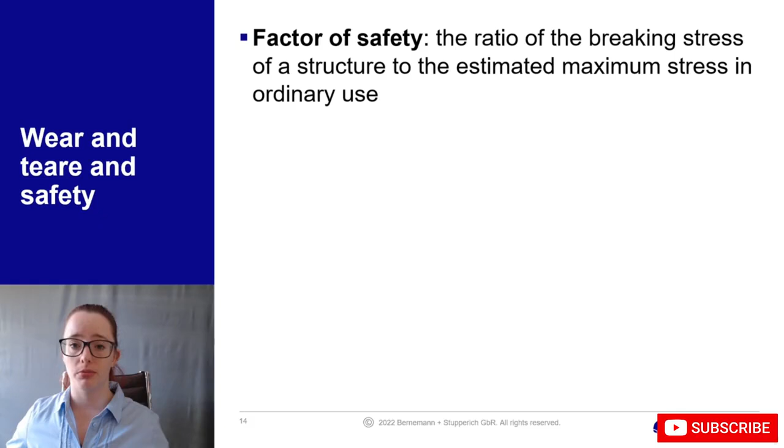Fatigue is a weakened state caused by long stress on a material. So if I keep on doing this each and every day, it will experience fatigue and then it will break at a certain point.

Reliability is the quality of being dependable. The tensile strength is the strength of a material expressed as the greatest longitudinal stress it can bear without tearing apart. So if I have this pen and I apply some tensile strength, you see that it is not tearing apart, and this is the tensile strength.

Now, I want you to pause the video and to apply some of the vocabulary you have just learned.

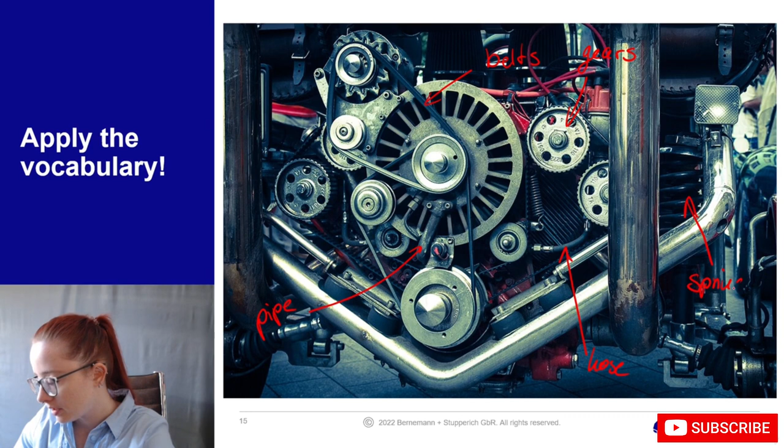So here we see an engine, or we don't see inside the engine, but we see it from one side. So what do we have here? We have belts, but we also have some gears. We have a pipe. We have a hose and a spring. We also have cables. Another thing we can see is the drive shaft. We can also see screws, for example here. And yeah, we can also see some rubber bearings.

Yeah, I think these are the most important points, and I hope you have guessed at least some of them. And now I say thank you for your attention and see you next session.

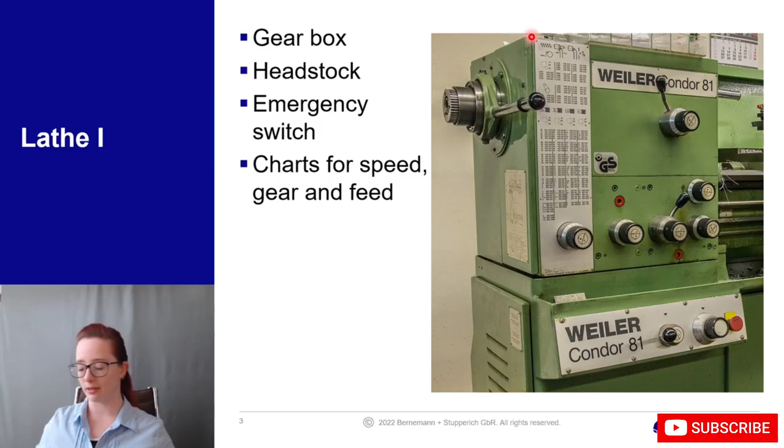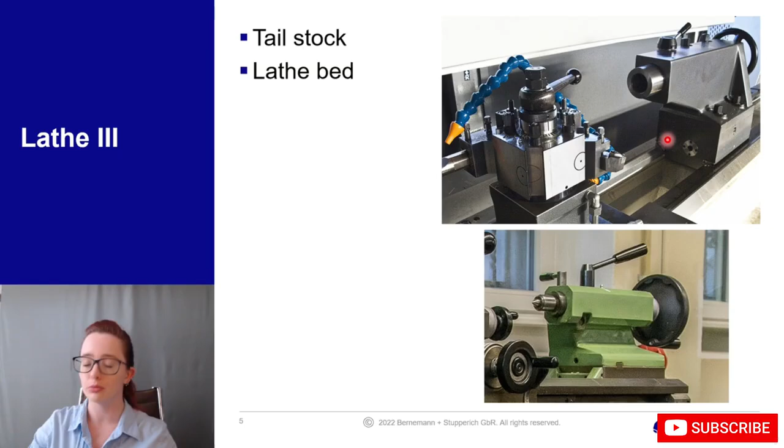The spindle or barrel is inside the tailstock, and with the help of this hand wheel you can move it out and in. The center is the pointy bit on the tailstock. A hose for cooling fluid is here.

And a quick tool exchange is up here. It is called like this because you can very quickly exchange certain tools.

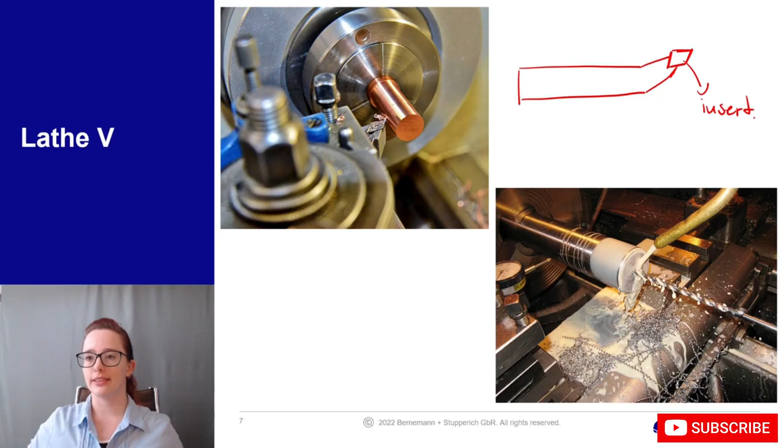Next to this, you also see some adjustment screws, here for example. We also see a workpiece out of copper in here. You can tell that it's copper because of the color.

And we have a collet chuck, this one here. Collet chucks are very good if you have round material because they tighten from the outside to the inside, and the pressure they apply is on the entire circumference. But they often leave very nasty marks, so you have to pay attention how tight you screw them onto your workpiece.

On the right side we see cooling fluid, which is this milky looking liquid here. And we see a huge drill bit. This drill bit is most probably inside the tailstock.

And to make sure that the hole we are drilling is in the center of this workpiece, we use a dial gauge. This dial gauge is measuring how centrical the workpiece is running.

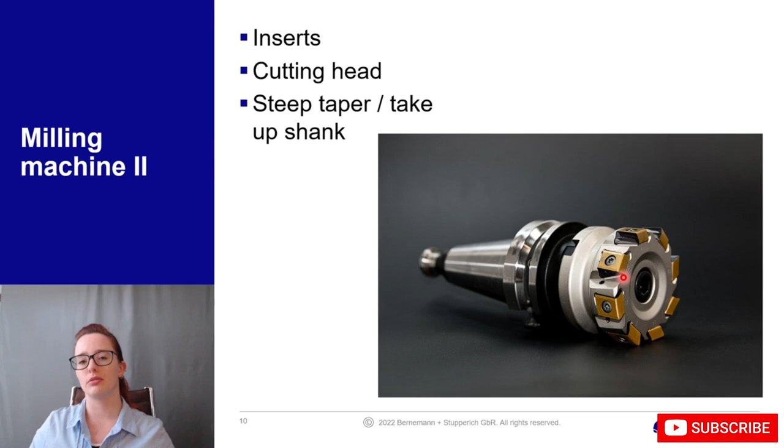Now we want to have a look at several milling or cutter heads. They have indexable inserts. Indexable means you can remove them when they don't cut well anymore, or you can also exchange them if you want to cut with a different geometry.

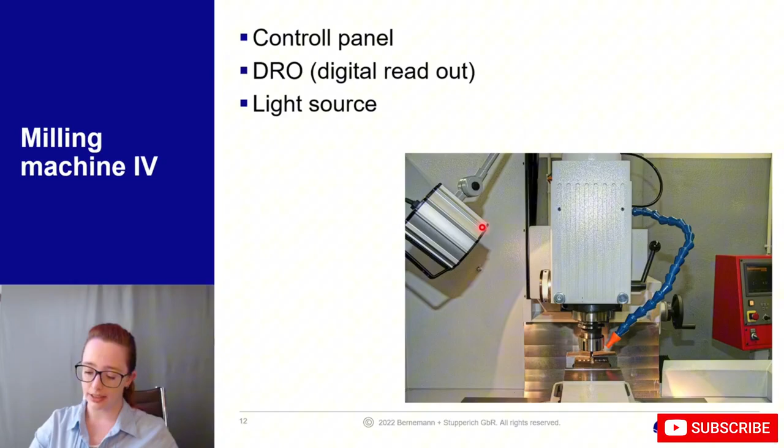We can see an additional light source, so you can always check what you are doing. And again, we see a hose for cooling fluid.

For example, like this one. This is a centrifugal pump. Centrifugal pumps always have a shaft in the middle, and they are always rotating, and whilst rotating they compress air or they transport liquids.

Another kind of pump is the piston pump. With this kind of pump, there is a piston moving inside a cylinder, and they are often used as air compressors.

We have a suction side, which is here. So here we have suction, and we also have a pressure side, which is here. This suction and pressure is caused by the running wheel, also called the impeller.

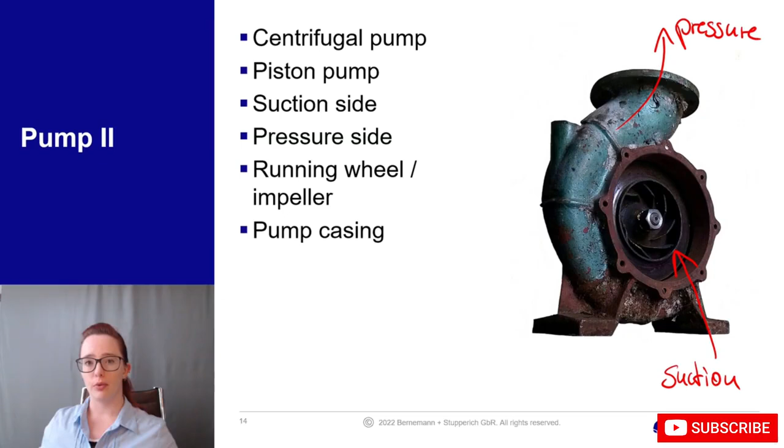We have a pump casing, which is everything outside of the impeller. And we have a flange, which is here. On the flange, we can screw the other half of the pump casing, so it is closed.